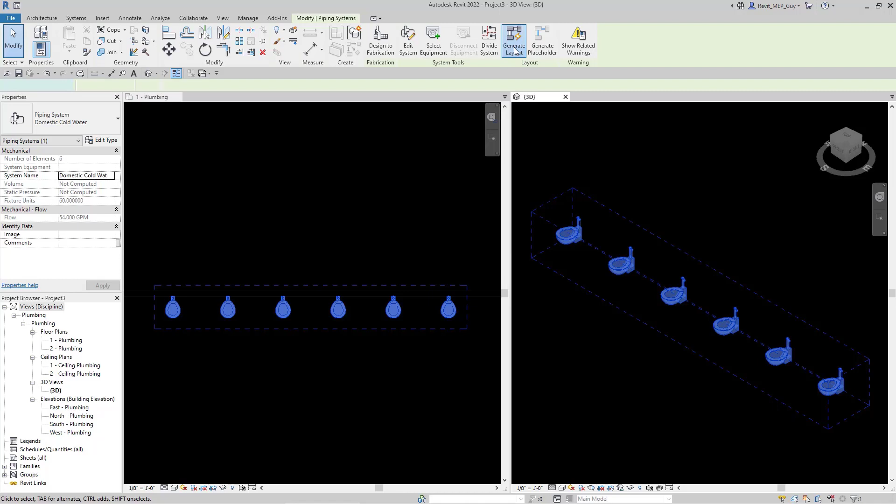Have you ever tried to use the generate layout command in Revit to size and automatically route your piping? Well, Revit gives us a bunch of options for automatic routing, but they just don't appear to really work for us. Even if we go to place base and I put it right here, there's just not a lot of options that will work with our plumbing systems.

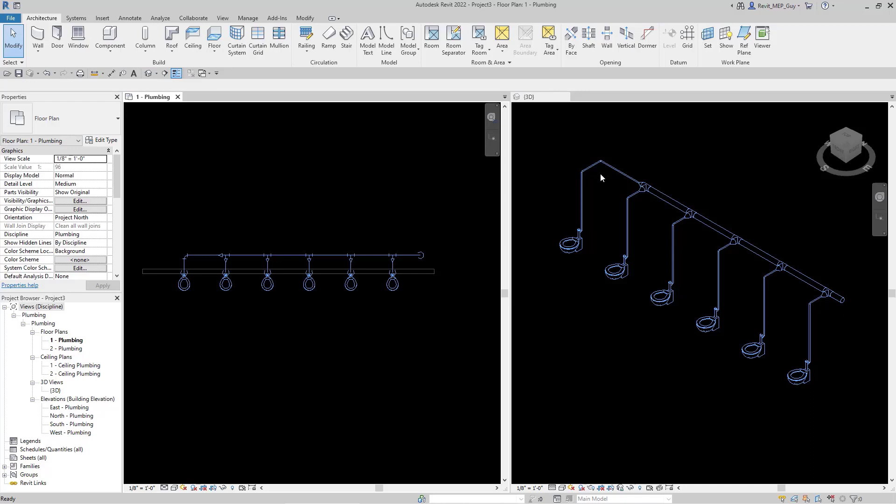And even if we do pick one of the options, when we hit finish layout, Revit displays this wacky system with crazy sizes that don't make any sense. I don't think anybody would be using a 6-inch water pipe for their water closets like this. So what I'm going to do in this video is show you guys how to utilize this command and really leverage how awesome it can be. We're just going to have to use a couple tips and tricks to get it to work in our favor.

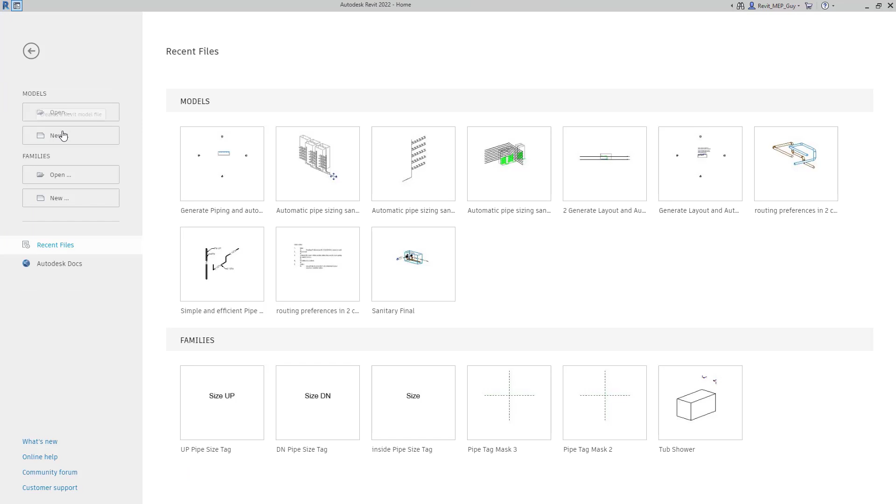And in this video, I'm going to show you guys how to automatically size and route using the generate layout command and the automatic sizing commands in Revit. So like always, the first thing we're going to do is open up a new plumbing default template. And once the plumbing default template opens, let's go ahead and draw some walls for our water closet. Let's use this rectangle. Now let's add our water closets to these walls.

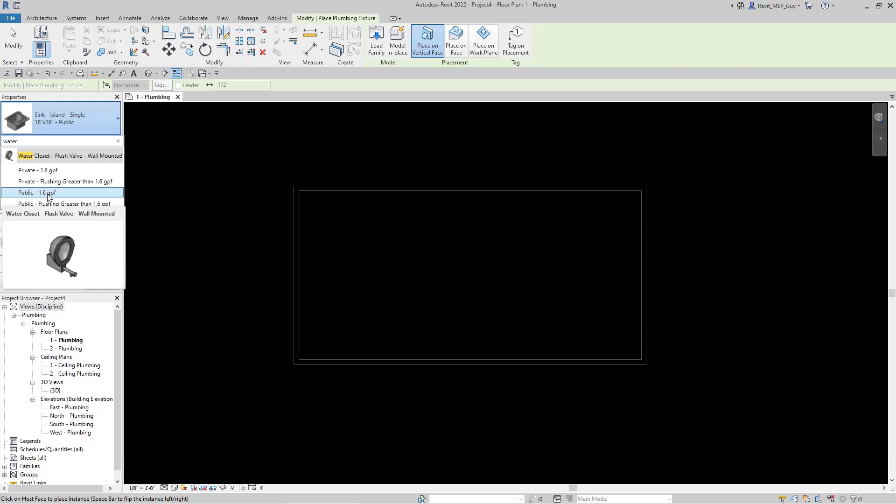Go to Systems, Plumbing Fixture. And since we have a plumbing template open, water closets are already loaded. So let's use this public 1.6 GPF, put it about 6 feet from the wall, hit escape, let's select it, use our array command, and let's create 6 of these fixtures. So we'll make this 6, and we'll go about 6 feet.

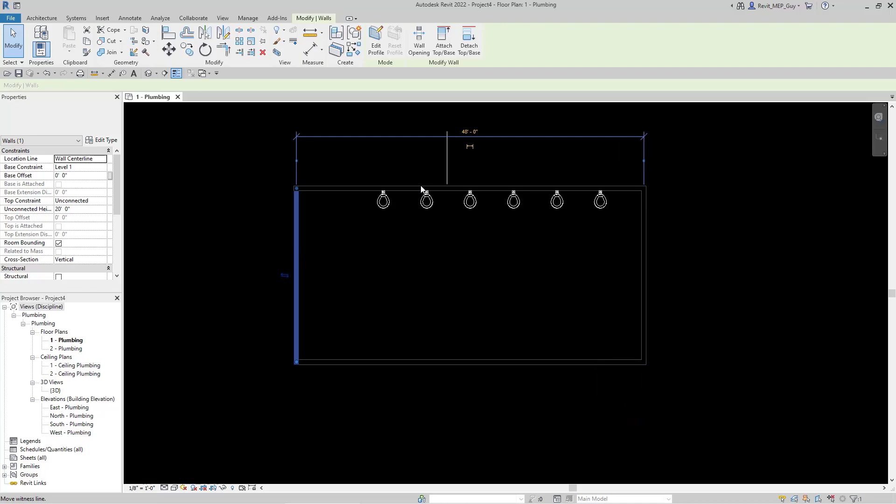Since this is 6 feet from this wall, let's make these the same distance from each wall, so that's 6 feet. So let's go ahead and make this 6 feet as well. And now that we have these walls, let's just delete these. So the first thing I need to do when I'm going to use any of these automatic sizing tools is I need to create a system.

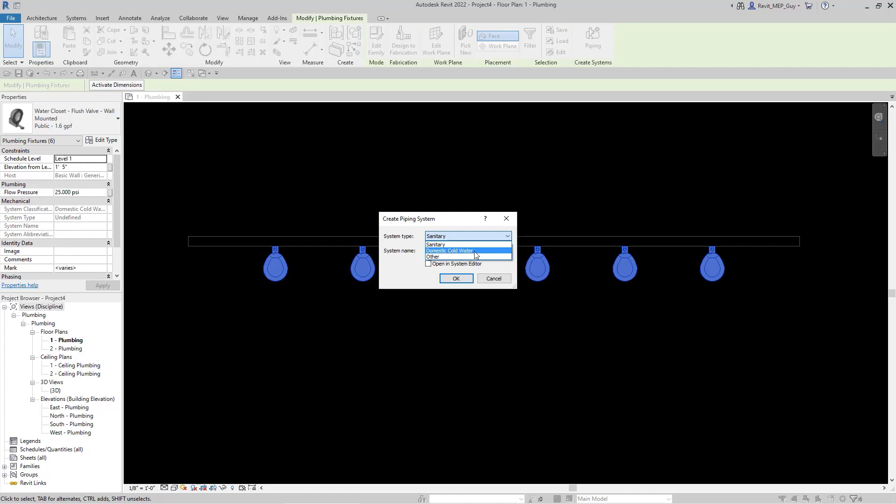So I select all of my water closets and I go up here to piping, and that creates a piping system. You can select the system type using the drop down, and it's going to give us 2 types of systems for this fixture. So let's select domestic cold water, hit OK, and now we've created a domestic cold water system. If we want to edit its colors, we can go to edit type, hit edit. And I'm going to change the color so you guys can see it a little better in my black background. Let's do this light blue color.

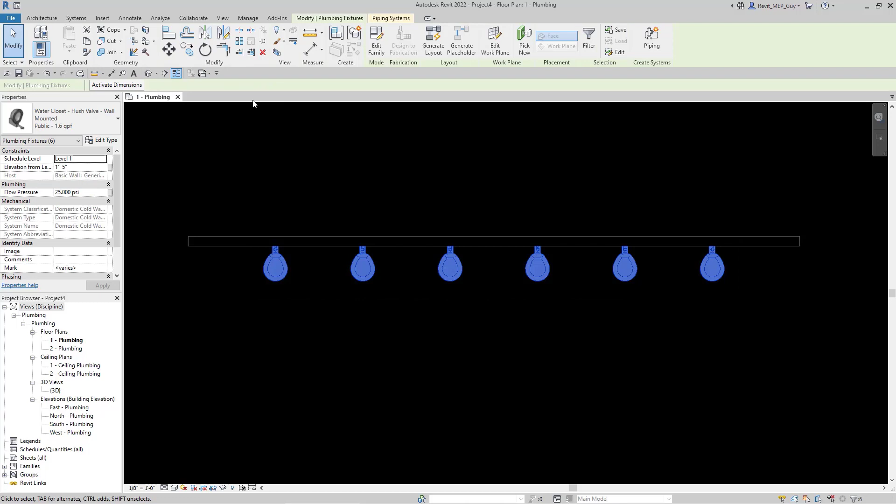Hit OK. Now I'm going to open up a 3D view so you guys can see the different layouts that Revit gives us. So let's use this section box. Let's go ahead and make this section box a little bigger. And let's just hide our levels. So we'll right click, hide in view, category. We'll hide our section box, and we'll also hide our walls. Let's drag this 3D view over here, and now that we have this all lined up, we can see both views at the same time.

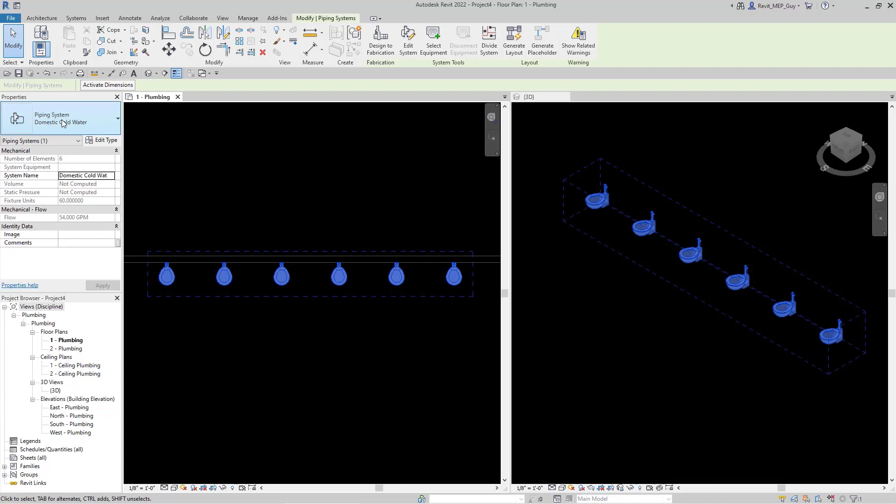So let's select our system by tabbing into it, clicking, and you know the system is selected because it says piping system right here. We hit this generate layout command, and Revit's going to give us some options for our layout. Now, right now it's on solution type network. And this command is actually made for mechanical HVAC mostly, but we can do a couple things to make this work for us. So if we hit this next solution, Revit's going to cycle through these solutions.

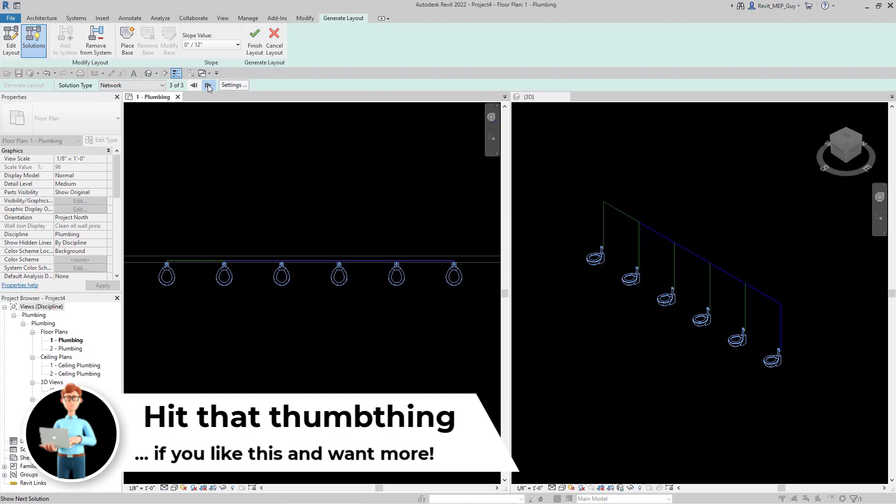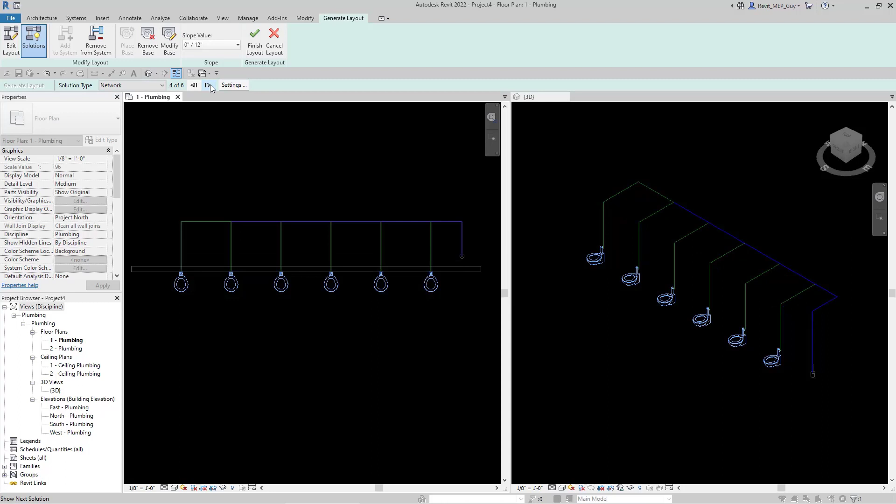But typically for a domestic water system or any water piping system, you're going to have a starting point. So we're going to actually use this place base, and we're just going to place it right here at the wall. Let's maybe go right there. And now Revit resets, so what we have to do is go back to solutions, and we can cycle through the solutions again, making sure we're checking out our 3D view. And as you can see, none of the solutions are really what we want. That one looks okay, but it's not perfect.

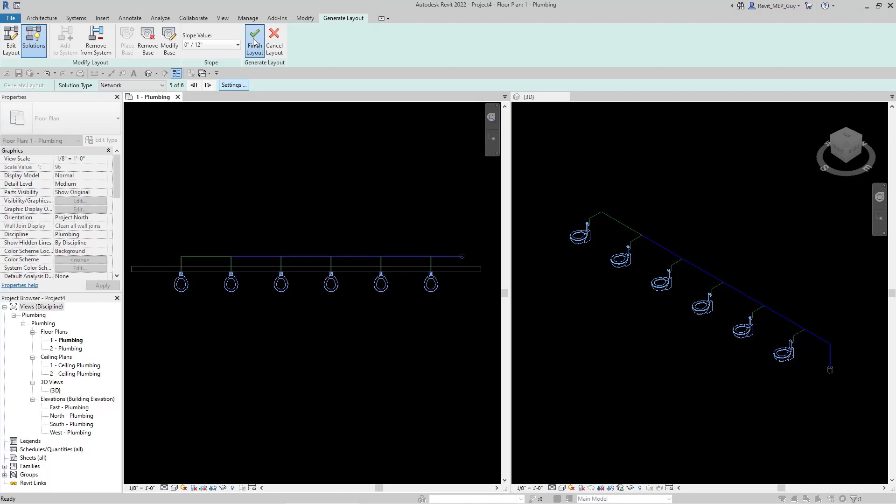We can go to the settings button right here and change the offset, and what that will do is bring our main piping down. So maybe we bring it down to, I don't know, 3 feet. Branch, we'll bring it down to 3 feet as well, hit OK. And that looks okay, so let's go ahead and just finish the layout. And we'll turn our thick lines off. I'm going to change the detail level to fine so you guys can see what happens here.

Now, the size of this pipe actually comes from the base that we placed. We should have probably set that to maybe 2 inches. But as you can see, this is not really the size of the pipe we want, and no plumber is ever going to install it like this.

Not to mention there are drop symbols right by our fixtures. So none of this is looking good, and this is really not what we want and not how we want to display on our drawings. So there's got to be a better way.

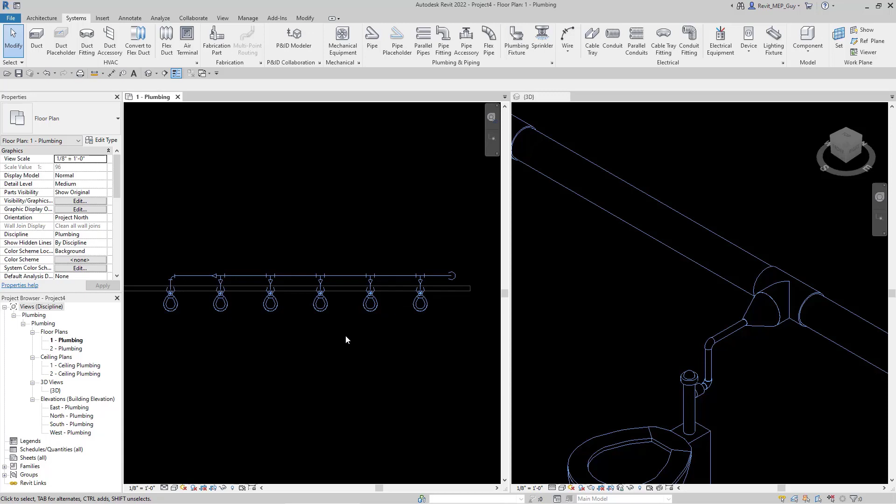So the trick that I've showed in my sanitary sizing video, and you can check that out, there should be a link somewhere. But what we need to do is we need to find the elevation of this piece right here. So I'm going to click on that piece of pipe.

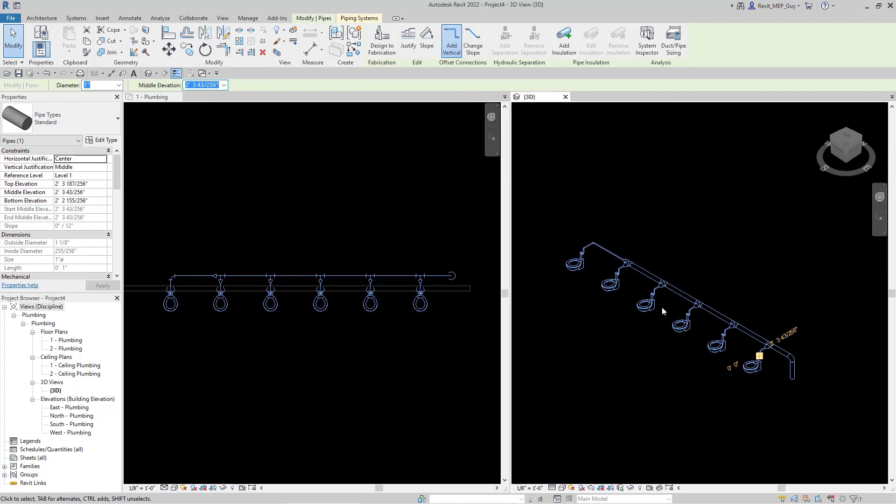And what we can do is we can take this middle elevation right here, and we can right click and hit copy. And now that we have that elevation, we can utilize that for our mains and our branch lines like we did. So let's select all these pieces of pipe using the tab, and then we'll just delete them.

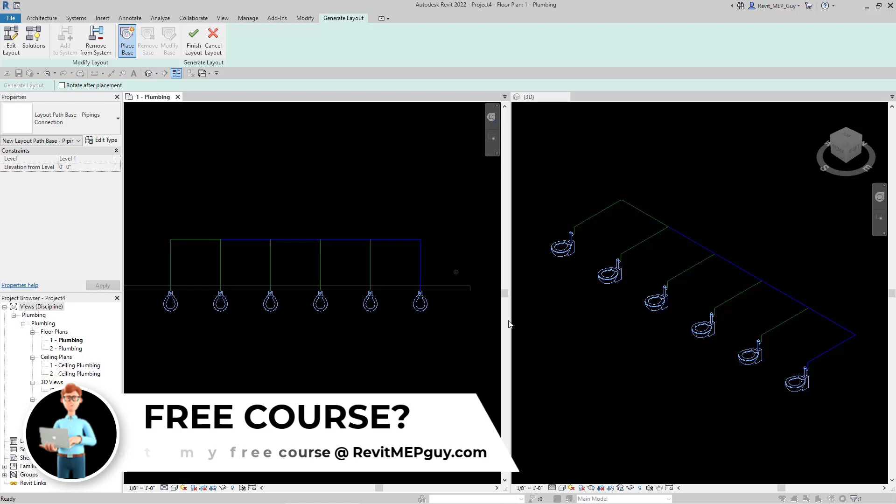And let's select our system again, zoom in, select our system by tabbing, clicking. Let's go back to generate layout. Let's place our base, and right now let's go to this view by clicking into it, and we'll place our base right here. We'll go to solutions, and we'll cycle through our solutions to the one that looked good. That one looks good, but we just need to adjust these elevations, so we'll go to settings.

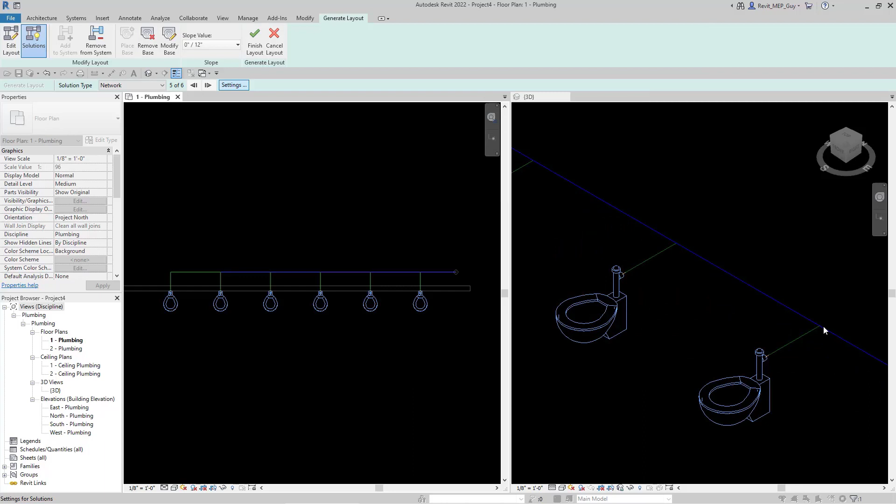And now what we can do is we can click into here, and we can just hit Control V and paste our elevation in. Control V. And when we hit OK, now the branch line and the main lines are at the same elevation as the inlet of this fixture, so everything should work now.

So let's go back here and let's hit Finish Layout, and that looks a lot better. Now we have the main and our branch lines teeing right into our fixture like we want it. But we want to obviously change the sizing so that it makes sense. So what we'll do is we'll tab into all of our pieces of pipe, and we'll click. And now we'll use this duct pipe sizing button or tool.

When we click on that, we can select sizing method, and the sizing method I'm going to use is by velocity. And you can check your local codes or any of your company standards, but typically you want to stay between 5 and 8 feet per second for water piping. So we'll make our max 8 feet per second.

For our branch sizing, we're going to actually use the match connector size, and what that will do is it'll match the piece of pipe right here to this connector size. So if I have a 1-inch connector on my water closet, it'll make sure that piece is 1 inch, and that's how they're going to install it in the field.

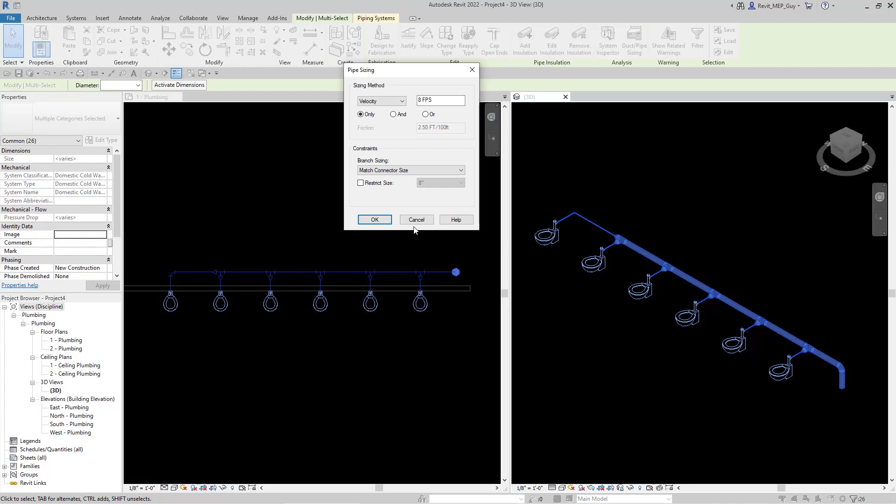So we're going to click OK, and now our pipe's been sized to keep all of the velocities of the water in this piping to a max of 8 feet per second. So if we click on, let's say, this piece right here, we go to our properties panel, and the GPM is 54 GPM, our fixture units are 60, and our velocity is 5.75, which is under 8.

And to show you guys what happens if we make this maybe a 1-inch piece of pipe, as you can see, the velocity goes all the way up to 22 feet per second. So obviously we don't want a 1-inch piece of pipe right there. So let's change it back to 2 inches. So everything's looking good. We might need to make some modifications here.

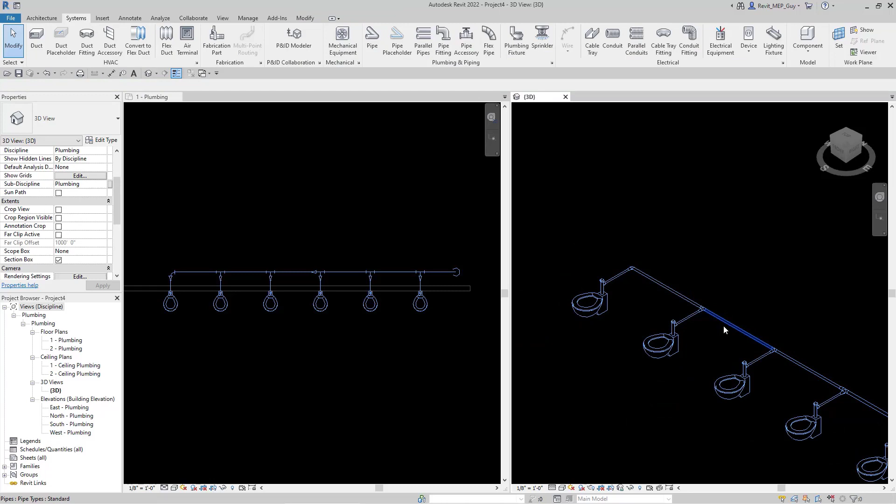Maybe I don't want this supply line to be 2 inches throughout, so maybe I'll select these pieces right here, and we'll change these to 1.5 inches. And what that will do is that will make this line from 2 inches to 1.5 inches all the way through, and then when it gets to the tee right here into this fixture, it'll make it 1 inch right here.

So that's all you have to do, guys, to automatically size your piping. You just have to make sure that your main line and your branch line are at the same elevation as your fixture. Now, there's another thing we would want to do in the real world. Typically, we're not going to have our water piping tee right into this fixture. Typically, there's going to be a little offset here for a flush valve fixture.

And what we can do is we can change the fixture itself to create an offset. So we can make that anything we want. So in the next video, I'm going to show you guys how to customize this fixture so we can control those parameters.